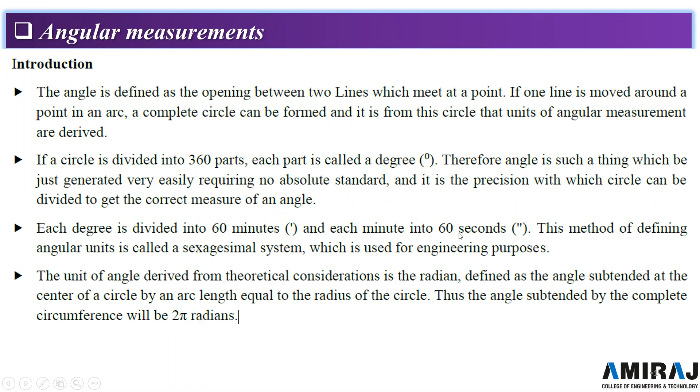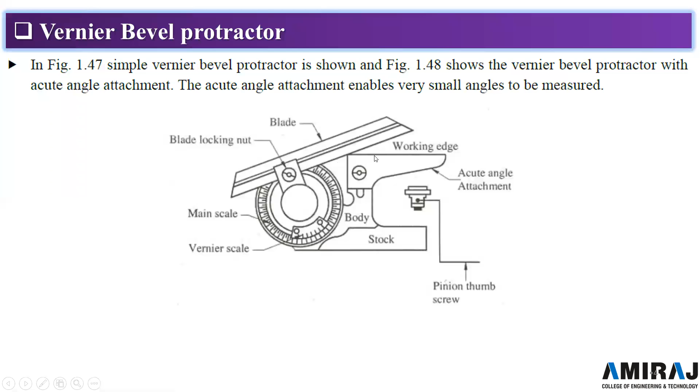And there are two types, vernier and optical bevel protractor. In vernier, there was one with the acute angle attachment, and one without acute angle arrangement. Then the measurement process and optical bevel protractor. Up to this, I explained in the previous lecture. Now let us start with today's topic, that is the sine bar.

Why this bar is called a sine bar, we will see from the working principle, because for angle measurement it uses the sine formula. To increase the height here, to set the sine bar at a particular position, we can use a stack of slip gauges. The slip gauges are used here mostly to set the sine bar at a particular position.

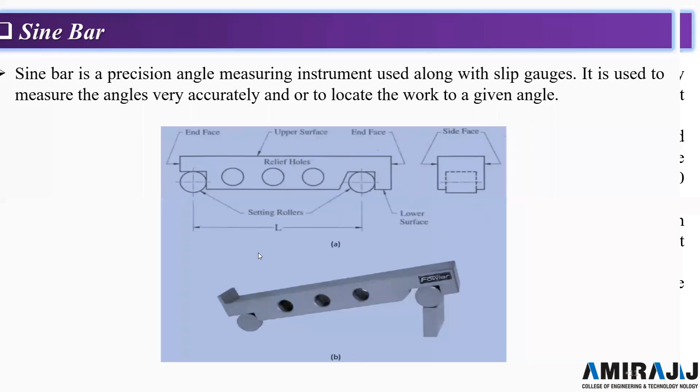Now the principle of operation of the sine bar relies upon the application of trigonometry. Okay, a simple trigonometrical application is used for applying the principle of the sine bar. Now one roller of the sine bar is placed on the surface plate and the combination of slip gauges is inserted under the second roller for setting a given angle.

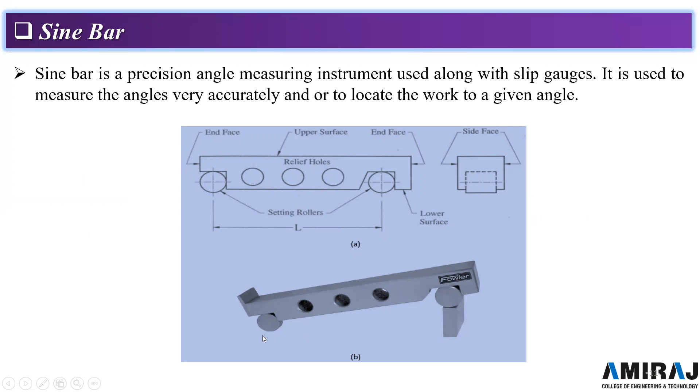so that the difference between them is taken. For example, these are the slip gauges. Suppose we put slip gauges below these rollers, so we can perfectly measure the angle, and the height difference is taken over here. The difference between h1 and h2 is taken.

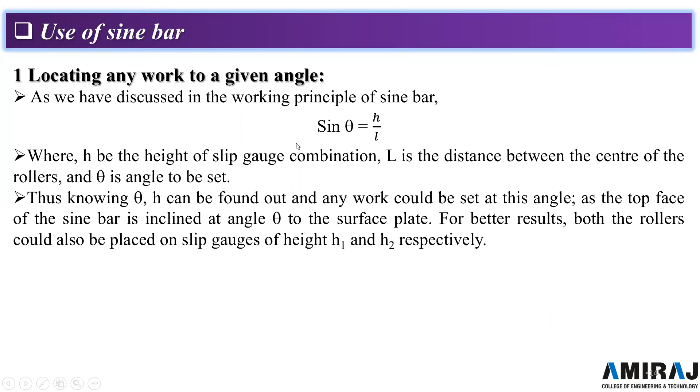Second type is checking or measuring unknown angles. First we have seen locating any work to a given angle, and the second type is checking or measuring the unknown angle when the component is of small size.